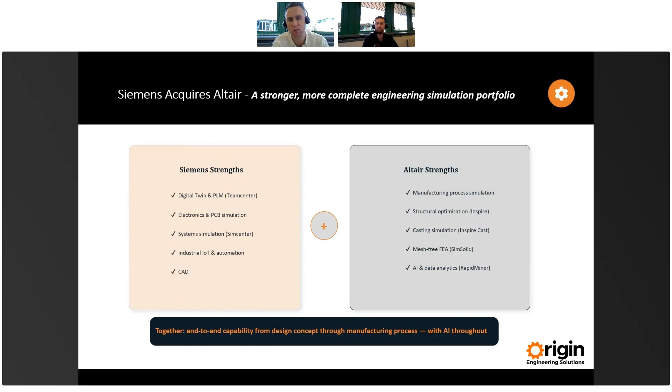Specifically for our casting customers then, we have the ability to provide CAD tools if necessary prior to a simulation, in addition to expanding the scope of what we can offer to start thinking about the shop floor. And this too lends itself to AI when we talk about that shortly.

Without going into too much detail, we've also seen aggressive development as we start to achieve parity with the other tools on the market, which have been around much longer. But we've also worked hard to try and differentiate our approach by introducing flexible mesh approaches, introducing specific modes to allow simulation to be done much quicker, and also to allow for optimization, experiments, and dealing with the product performance post-cast, essentially closing the loop and offering more before and more after the casting is produced.

So if we tie that back to some of the things that Tim is going to show and look at a casting workflow, then we start with a model. Here, we might use the built-in tools within the casting simulation tool to clean up geometry, or we might use a full-blown CAD tool, which we can now offer, such as NX Essentials.

We could then use built-in FEA tools to check the design part's performance and also potentially offer new services to customers focused on looking at the part that they've sent over and looking at opportunities to optimize that part to reduce weight and save on material usage, also while making sure the method is still going to work and we still achieve similar strength targets.

We could then look to validate the stresses on a part during manufacturing to show any problems in performance post-cast. Again, an integrated approach. We design, we optimize, we validate, we iterate, all in the same platform, all under one license.

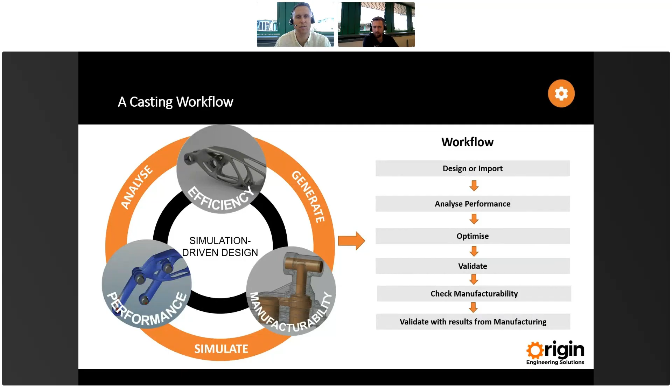So we see a lot of hype around AI. You always see the end result, and it often looks like magic. Looking specifically at a casting organization, I've broken up the silos of data, or places where you might have data, into three core pillars.

We've got corporate data, which would contain information about customers, meetings, quotes, finance information, billing, that sort of stuff. We've got operational data, which might hold information around machine performance, information about quality issues. And then finally, we've got simulation data, all of the data you're accumulating through those simulation runs. So we've got three silos of data there.

AI really can do two main things. It can answer questions based on available data, and it can trigger business processes if we provide access. We've all asked ChatGPT a question. It's not as magic as it sounds.

You ask what the weather is, so the model looks at its training data and, where necessary, searches live sources such as the internet to return the answer. It's great because it's much quicker at reasoning than we are. For example, if you sent a spreadsheet of 1,000 customers with job data, it would very quickly be able to tell you who's the most profitable.

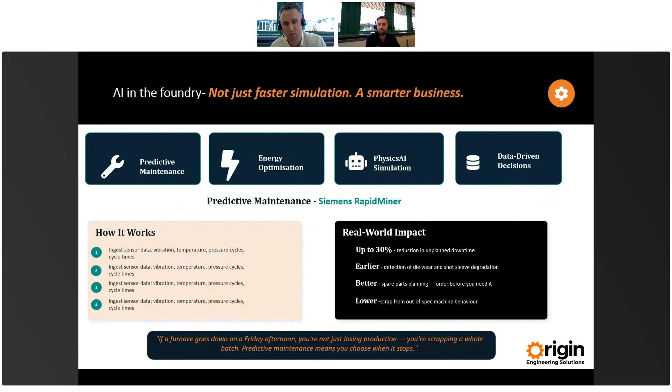Those same sensors could also be used to optimize energy usage. So we could track energy and machine energy usage across multiple process levels. We could flag furnaces that perhaps are holding temperature unnecessarily. We could benchmark the energy cost per part, so we could use that to be more effective in our quoting processes in the future. And by doing all of this, we hopefully save a bit of money, but we also demonstrate, particularly to our OEM clients, that we are taking sustainability seriously.

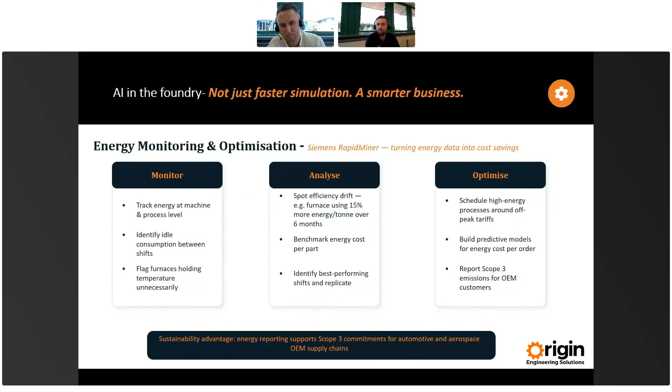The final example I will show is an example using simulation data. So all of these simulation runs that you're doing, how we might use this. Now, I must apologize, the video is rather quick. We will make this available or are happy to discuss this with anyone after the session, but hopefully I'll try and narrate over it.

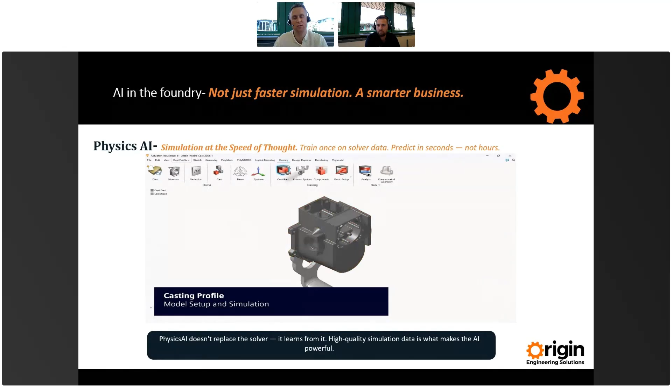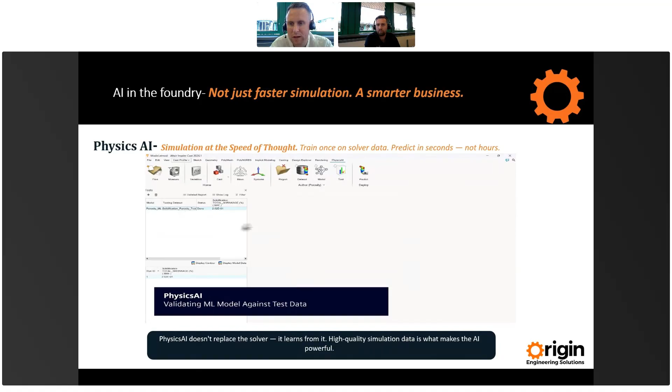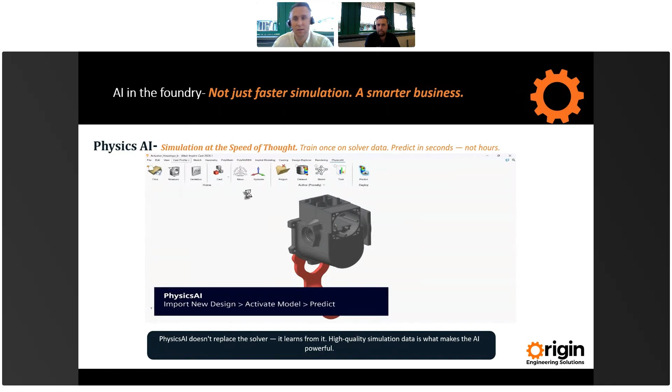What we're seeing here, and Tim will most likely show you this, is all we're doing here is creating a simulation, just like you would in any piece of simulation software. So in this example, all we're doing is getting some results. Then what we're going to do is create a particular project, because what we want to do is train a model on the simulation data. So what we're doing here is actually inputting some simulation runs to start training the model. So data's important here. Once we've done this, we can start to validate that model against some of the test data that we've got. And then next time we create a design, we're able to leverage AI and the test data that it's got to start making predictions for us.

So the value of that really is that, number one, we start to use our simulation data. We start to feed it into an AI model. So again, if someone leaves the business, perhaps that knowledge is not lost. The AI model has got it. But also, if you're doing lots of different iterations of quite similar methods, perhaps products with slightly different dimensions, then if we train AI on it, we can often get answers very quickly without necessarily having to wait and run simulations all the time. So it certainly doesn't replace running simulations, but it certainly gives us some very quick insight before we even click that run button, which is very valuable in terms of reducing simulation time.

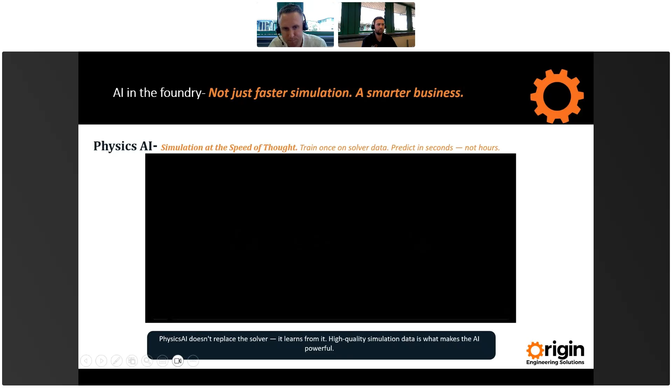So I hope you found that interesting. I mean, obviously AI is harder to demonstrate really, because essentially it's just making sense of data.

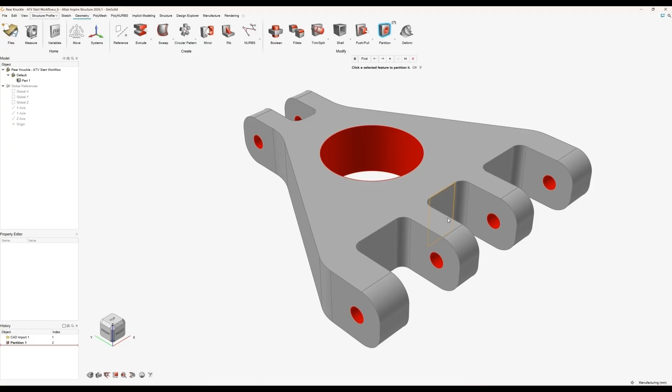I'm going to use the partition tool, and this finds all these holes and features in the model. I'm going to hit the tick box, specify 4 mil here, and accept that. And what you can see is this basically partitions these areas. What this means is for the actual optimization, it won't remove material from these areas.

So everything else becomes what we call design space. It will be able to remove material from these areas, but not crucial areas, where we've got loads, forces, and features being applied. I don't want to start removing material from a hole that is crucial to the performance of the part. So that's the first step.

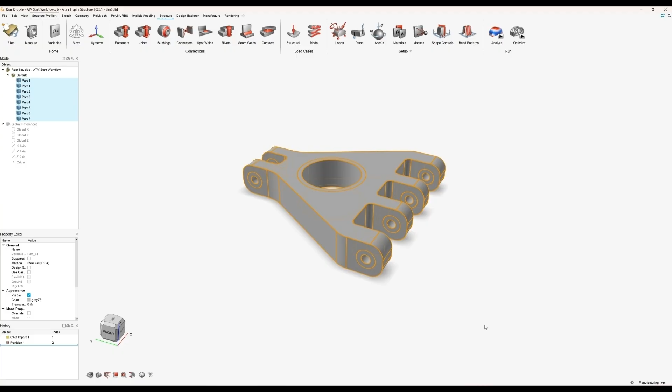Then we're going to go into our structure tab. The second step is I'm going to apply a material. So I'm going to box select all my solids, right click, go to material, and just specify AISI 304. You can do this via the materials tab. You can add your own materials, create materials, all that sort of stuff as well.

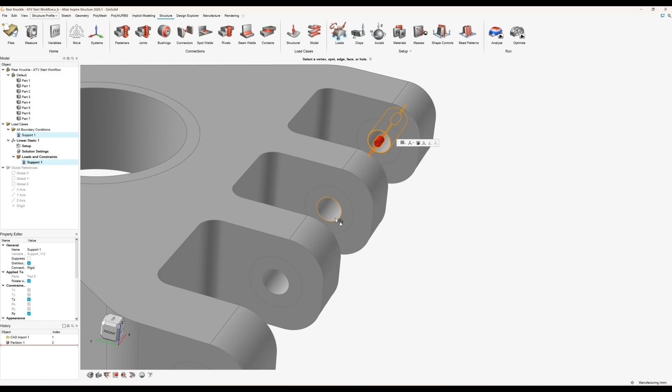Now I'm going to start applying some supports to these cylindrical holes on the model. I'm going to accept that, and then click on these supports, and they're not fully constrained. I'm going to allow them to move in this direction, so they are able to rotate around these areas.

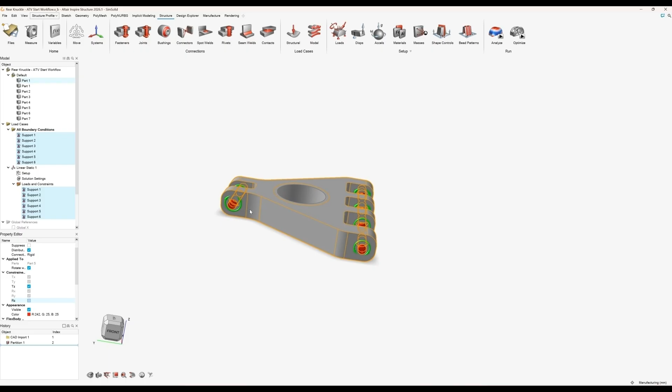And then I'm going to apply some forces. These forces are going to simulate some standard driving forces. We've got things like braking, bumps, cornering. I'm going to have 4 load cases simulating each of these actions.

But first, before I do that, I'm going to set up my load cases. So this is load case 2. Those are the supports that are used in it. This is load case 3. They're all using the same supports. And load case 4. So I've got my 4 load cases created, and then I'm going to apply some forces.

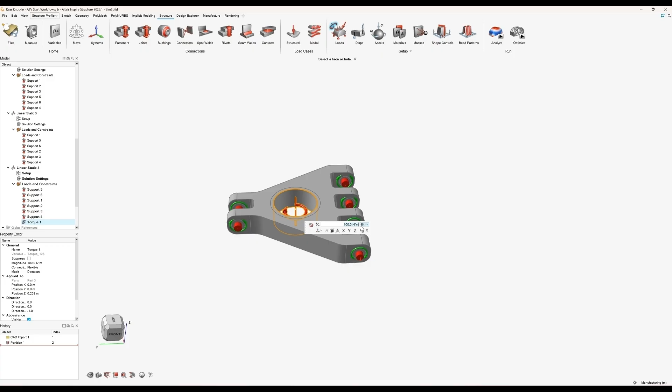So we're going to add a torque force, and I'm going to change my units down here to meters for the purpose of this. I'm going to change this to 400, and I'm going to apply a braking force in the Y direction, and maybe we'll have that at 2000. We can apply some cornering forces. Maybe that's in the Z direction. I'll apply that at 3000.

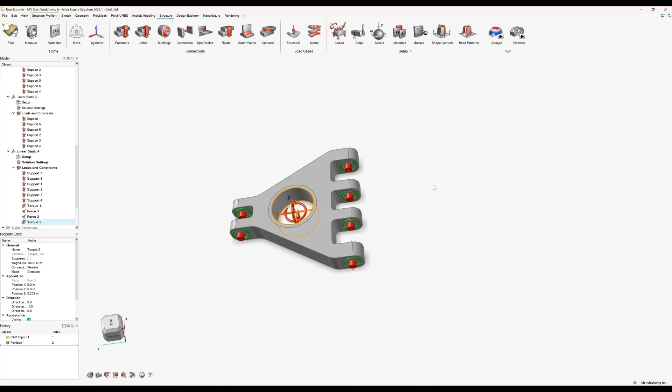And I'm also going to apply another torque force. I'm going to apply it in the rotating Y area, and just apply that as 100 Newton meters. This is just simulating going over small bumps and things. So those are my 4 forces created.

What I'm going to do is just make sure they're all in the correct load cases. So I've got my torque 2 here. This should be in load case 4, which is correct. I'll put that one in load case 3. So make sure it's in load case 3. And force 1 will be in load case 2.

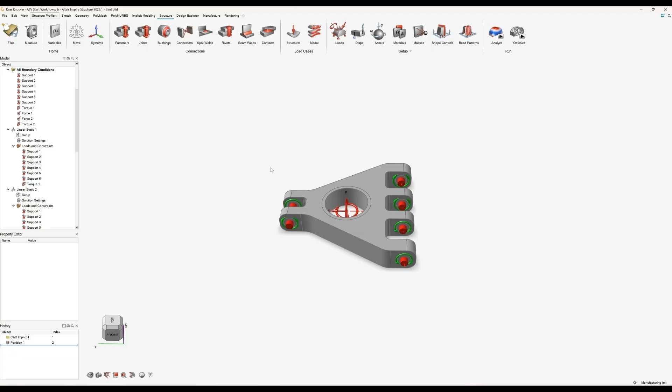And then torque 1, that'll be in load case 1. Okay, so we're pretty much actually ready to get some results now. So all I need to do now is go to my Analyze tool, click on this play button. This allows me to select which solver I'm interested in. So we've got SimSolid or OptiStruct. The load case I'm interested in studying.

Literally hit the Run tool, and you'll see no contacts in the model. That's because I did this partition. I'll click Find and Run. That'll just designate bonded contacts to those areas. But you'll see within a few seconds, we'll have a completed solution. We'll get a green flag appear here, and we'll be able to click on the green flag and actually load our results. So you can see how quick that was in actually getting results.

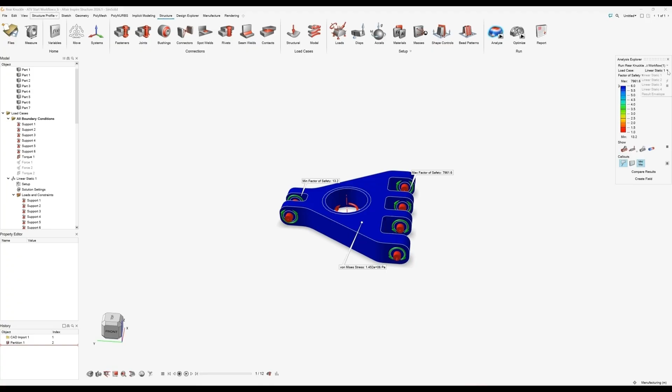I'm not going to go through the results in too much detail today, just purely because we haven't got time. Obviously, you can see some of the result variable types that we've got: displacement, factor of safety, von Mises stress. We can see things like min-max. We can put call-outs on areas to understand the values. But the thing I'm going to be focusing on today for the demo is factor of safety. So we can see in this one, we've got a minimum of 13, and we can go through these and have a little look at them.

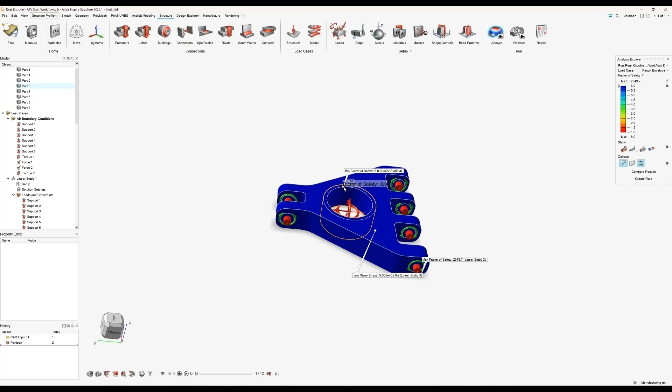But I'm looking at my results envelopes. This just allows me to see the minimum factor of safety in total. And we can see that we have got a minimum of 8, maximum of 2,500. And we can start to see where these are. So you can see actually it's on a sharp corner point. So in reality, we might not have a very sharp corner there. It might be rounded off. Probably the factor of safety might be a little bit higher. We could have added that and run another study on that. But we can see our factor of safety is 8.

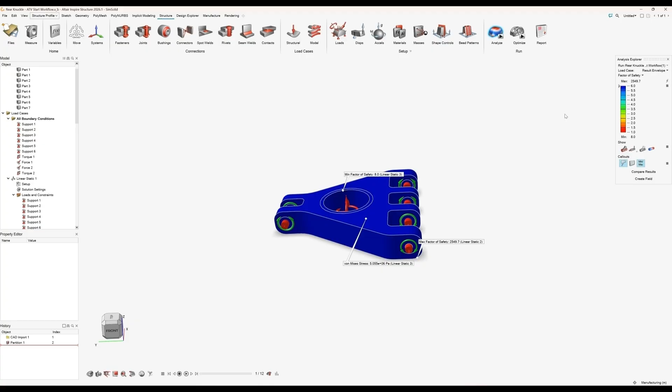Motorsports, again, high performance motorsports, maybe let's say this part's for. You might be looking at factors of safety of maybe 2 to 2.5. For the purpose of this, let's say that we're going to try and meet a factor of safety of like 5 or 6. And that will allow us to meet our performance characteristics while still reducing weight. So those are our results. We can go through those. If you're happy with them, you can move on to the next step. Also, this part, obviously, we are looking to reduce weight. I think this part weighs around 1 kilogram.

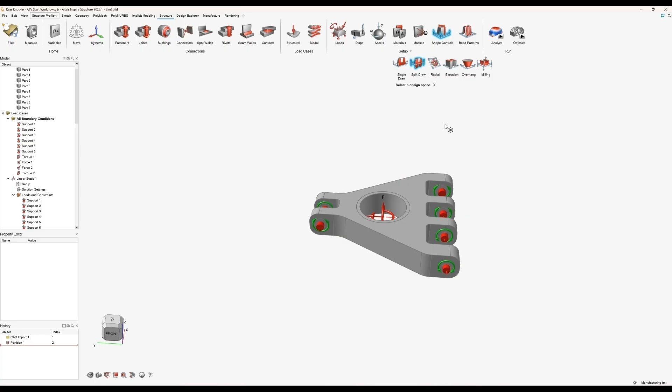So we can then move on to the optimization, which we're all set up for because we've set up the FEA. We now can move straight into optimization. But before that, I actually want to set up some shape controls. So shape controls are great depending on how you're going to manufacture your part. So for our example, we're going to say that it's going to be a split draw, select a design space, and then you can specify your draw location. I'm going to choose that one, and I'm happy with that. So now I've got some shape controls. Depending on how you're going to manufacture it, if you're machining it, 3D printing it, extruding it, you've got different shape controls for that.

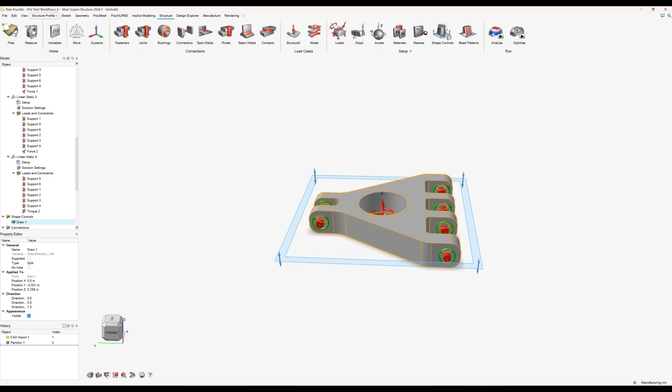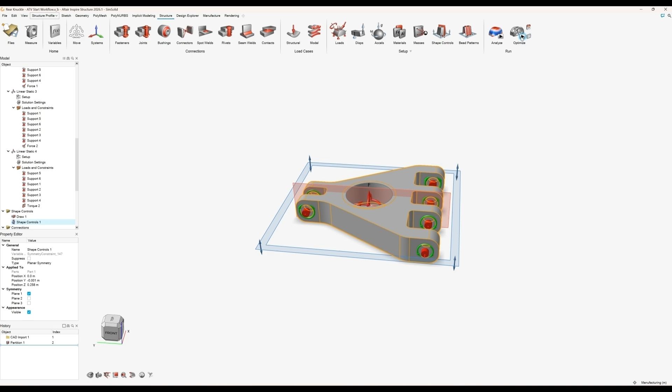Then I'm going to apply some symmetry as well. And I actually want the symmetry plane to be not that one, but this one. So it's symmetrical down the middle. So I've added my shape controls and my manufacturing constraints. Now I can move on to my optimization and set up our targets.

So I'm going to use maximize stiffness, but we can use maximize frequency, minimize mass. We've got different types of topology optimization as well, what you can see here, but I'm going to stick to standard topology optimization. I want my mass target to be maybe 60% of the part, and you've got other constraints as well. We can apply thickness constraints. We've got porosity constraints. Obviously porosity constraints will be useful for casting, but for the purposes I'm going to specify none.

We've got minimum factor of safety constraints, so I might want to specify a factor of safety of 5 or 6, and then specify the load cases you're interested in. We can turn on gravity as well, and then we can hit the run tool.

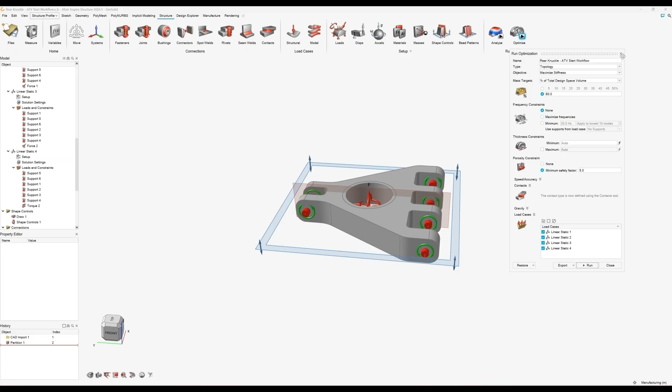No design space set, so that's what I was talking about earlier, the design space. This is an area where obviously the solver can remove material from. So I just want to right click on this solid here, specify as design space, and now we can see that's design space. Go into my Optimise tool and then click on run.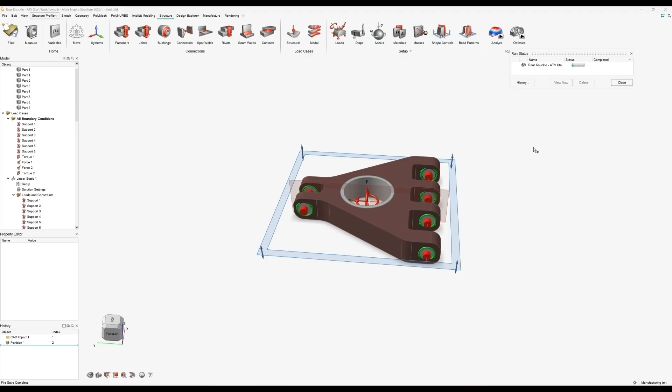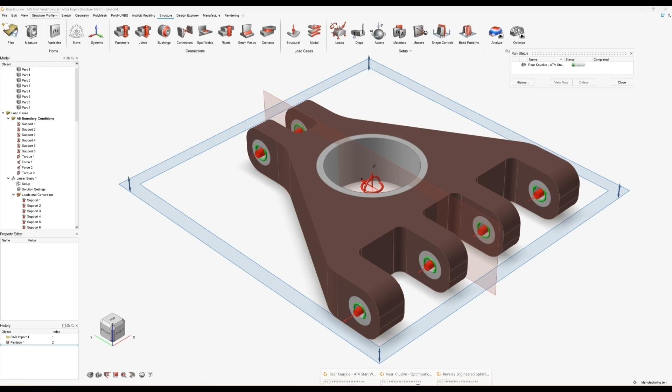So this will start solving. For the purpose of the demo, this isn't meshless and instant. It does need to actually create a mesh to get our results. This isn't an instant solver. So for the purpose of this, I'll just show you one that I did earlier. So I will show you the result now. I'll just open another instance and take you into the result of this method.

So this is what we can see here. One thing I just want to quickly touch on again is porosity constraints. So here we can specify a minimum safety factor, but this will take into account porosity constraints as well. What this does, it doesn't eliminate porosity, but it actually reduces the stress in high porosity regions. So behind the scenes, it's basically doing a quick solidification analysis.

This allows us to see the last areas to solidify, thicker regions, and then it's optimizing the part around this and reducing the stress in the high porosity regions. This is the last thing you'd want if you do have any porosity in your part. You don't want it to be in high stress areas because that could then fundamentally weaken the part further. So that's just what the porosity constraint does.

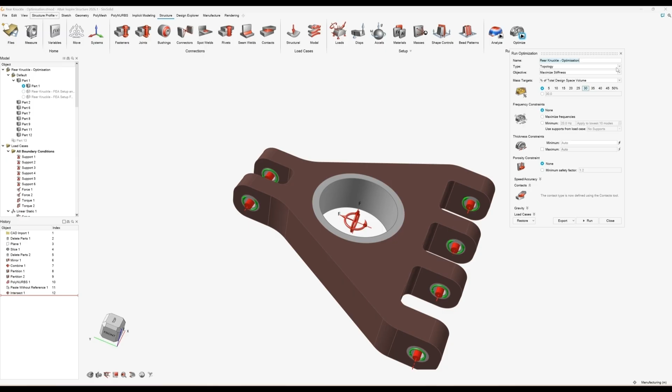So let's show our optimized part now. What we see here is the result of the software evaluating all load cases simultaneously. And this allows us to see where material is needed and where material isn't. At this point, we can use the automatic polyNURBS tool, this fit polyNURBS tool, or we can analyze the result. That will just create a validation simulation on the shape as it is here.

But I'm going to click the fit polyNURBS tool, and this will basically instantly smooth and wrap the shape. We can then actually manipulate and modify this within the software. You'll see one of the tabs along the top is a polyNURBS tab. This allows us to manipulate polyNURBS surfaces. If you're then happy with it, once you've manipulated it, you can export that as a solid model in whatever format you wish.

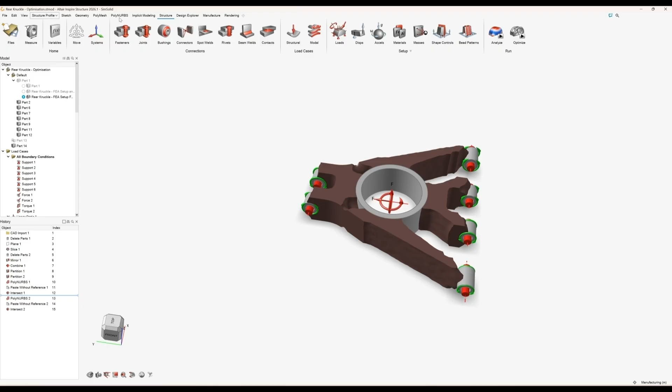Alternatively, if you aren't keen on the organic shape, sometimes you do get very organic shapes, maybe that's not your preference. You can export this as STL and use it as a guide and reverse engineer in your preferred CAD tool or within Inspire, which is what I've done.

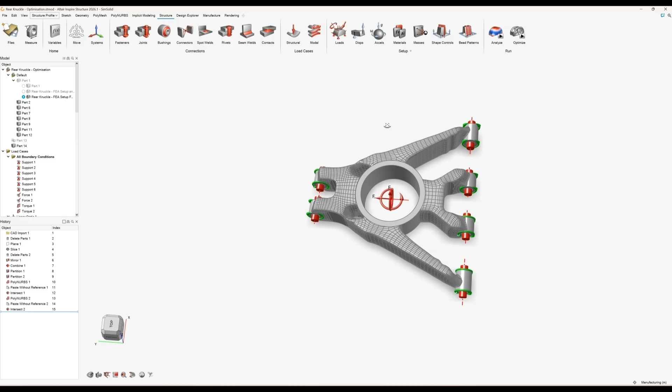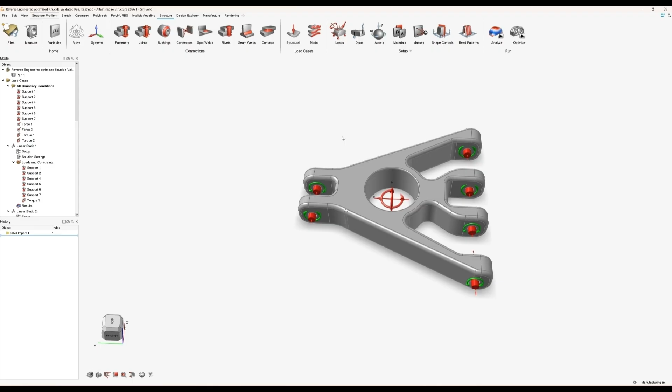So this is the polyNURBS shape. If you're not happy with this, you can go into your polyNURBS tool as mentioned and play around using all these tools, or you can use the shape as a guide and reverse engineer over it, which is what I've done. So I'll just show you that now. So this is my reverse engineered shape, which used this as a guide. I'm not going to show you that process because we just haven't got time, but it doesn't take too long. Hopefully you can see that there.

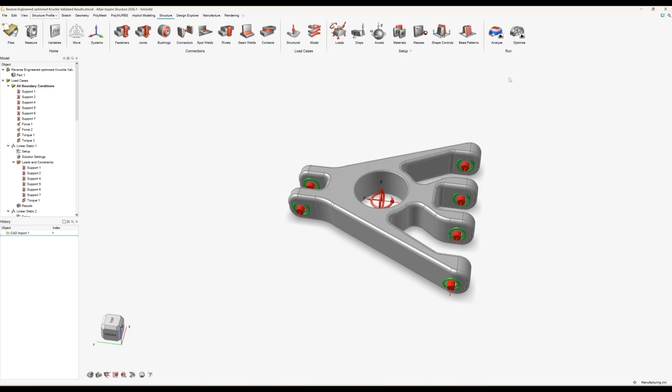But we do need to validate this. I have already got this set up, so you can see exactly the way I had to set it up before. It's the same constraints, same forces and loads, but we need to validate it to make sure it does actually still meet the performance requirements. This one's already got results in it, so I can just hit that button there. You can start going through some of your results again and look at different result types.

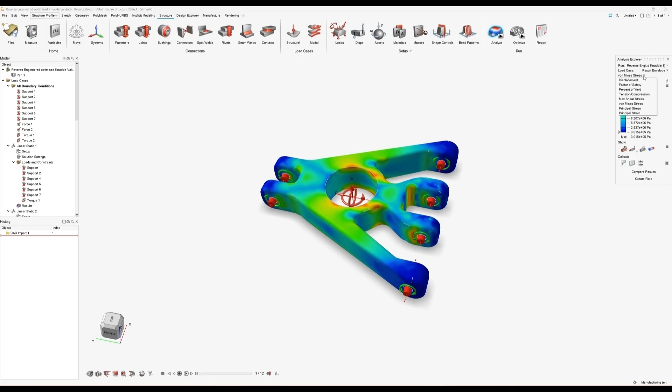I'm not going to go over these in too much detail, but the main thing we were looking at for the purpose of this webinar is whether we meet the factor of safety requirements that we were after. So I'm going to specify the results envelope, go to factor of safety, and we can see here minimum 7.9. You can see I've got some small radiuses on this one, so that might have helped. But we've got a minimum factor of safety of 7.9.

I think before we had a factor of safety of 8, so slightly less, but we've reduced the mass by quite a decent amount and are still matching the performance characteristics that we need. So you might even say it's still over-engineered a bit, still room for improvement, still room for mass reduction.

So that's just showing that we validated our model. It still meets the performance requirements, but that's stage 1 complete. Now stage 1 complete, now we can move into obviously manufacturing validation.

Obviously, this is where your knowledge is crucial, and where partnerships can be formed with your customers on projects, because it's all well and good the optimization spitting out a final shape, but this is where you will know if that part can actually be cast or whether it's going to be very, very challenging to cast. So that's where your knowledge comes in crucial, and as I say, partnerships potentially can be formed with customers or partners. So let's move into the cast profile.

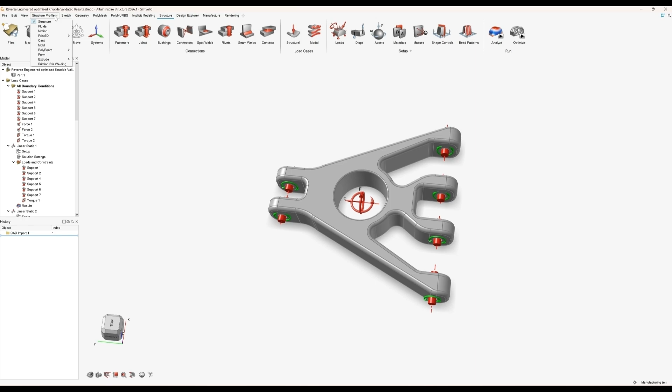So within one click, we're seamlessly in the Inspire Cast program now. Hopefully you can see here that we've got a few different tabs along the top. Still got our sketching tools, our geometry tools, and other modeling tools. But now we have our casting tab, and obviously this is where we set up and explore our results from our casting simulation and our method engineering.

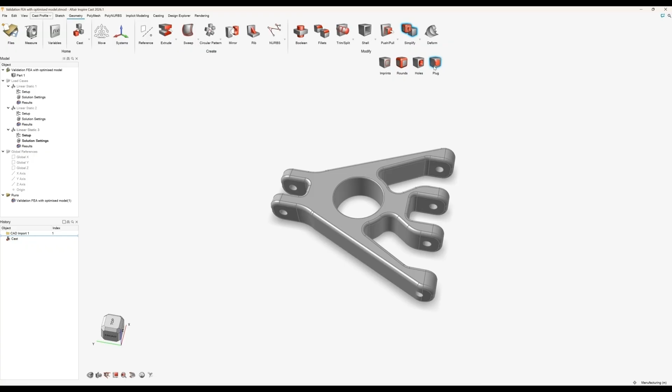Workflow in this tool is left to right, so you start from the left and you work to the right hand side. But first of all, I'm actually going to use a geometry tool again. We did briefly look at that partition tool earlier, but I'm going to use one of my simplify tools now. So in simplify, we've got a number of tools to potentially defeature your model, but one tool I'm going to use is the plug tool, and I'm going to plug, so basically fill in, all these holes except that center bore, and hit this button here, and we can see those holes have been filled in.

One thing I actually need to do following that is just use our Boolean tool, because actually these are all separate solids at the moment. I'll just box select all these, remove the imprints, and now that becomes all one piece. So the reason I've filled in those holes is obviously they are crucial, but we are going to machine them out afterwards. They might be to high tolerance, and potentially if I cast them, it might cause some issues, maybe thermal hotspots, fluid turbulence, and potentially core pinning issues.

So now onto the method development, and what makes Inspire Cast such a great tool is its simplicity and accessibility. All the clever stuff is done behind the scenes, meaning you get a really clean user experience with straightforward workflows. And again, we haven't got loads of time to go through true full method development, but it might look something along these lines here.

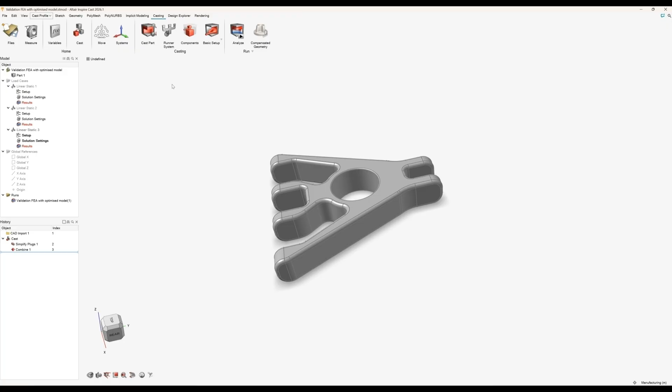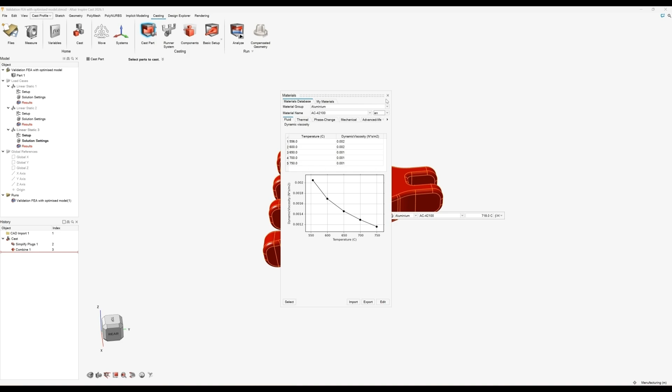So in our casting tab, as I said before, its first step is to designate the cast part. So we can click on this tool here, choose our material, and then specify a pouring temperature. If we click this button, this takes us into our material database. We can see all the different standards, and we can see all our properties, and we can import and export materials and modify these properties if needed. I'm going to accept that. The next thing I need to do is just check that gravity is in the right direction. I'm happy with that direction for gravity, so I'll accept that.

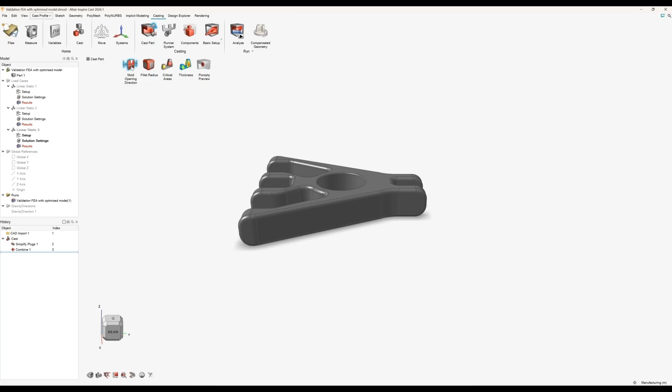And then we also have a part analysis tool. So this is a great tool for quickly checking things like mold opening direction, so we can see if any surfaces haven't got any draft angle added to them, which might cause us some problems. So obviously I have forgot to add draft angle to these areas, but that's something I'd probably want to look at if I actually was going to go ahead and create a mold for this.

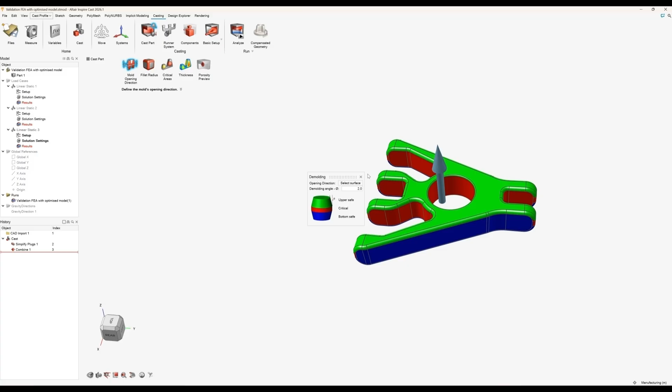We've got a fillet radius tool, which allows you to check the fillet radius in critical areas, and a thickness tool. You can just click this tool and it will give you a thickness analysis, telling you your thin and thick regions. I'll change my units to millimeters so we can see our thinnest and thickest regions, with these color schemed, color mapped there.

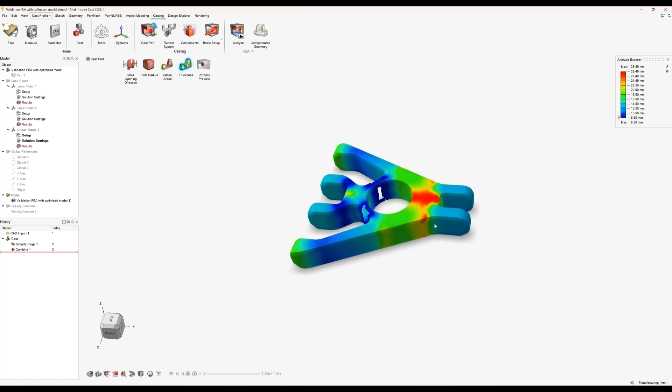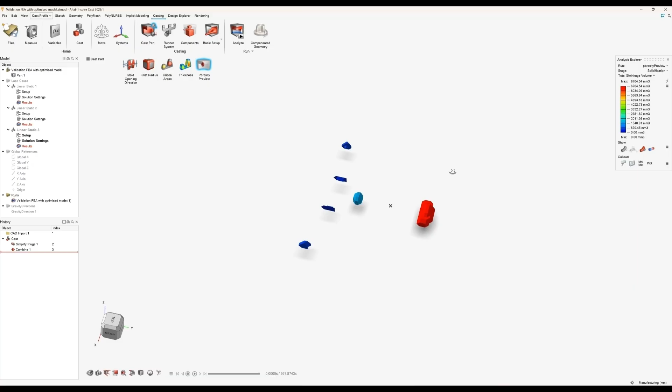We also have a porosity preview tool. If you click this, it gives you a quick solidification analysis within a few seconds, which allows us to see where we might get potential shrinkage. We can look at solid fractions to see potentially how this part might solidify. This doesn't take into account runners and components, but it gives us an idea of the areas that might be last to solidify, which can guide us in terms of component placing.

So those are the things we can look at there. We can also look at geomodulus, which might help with feeder size and stuff.

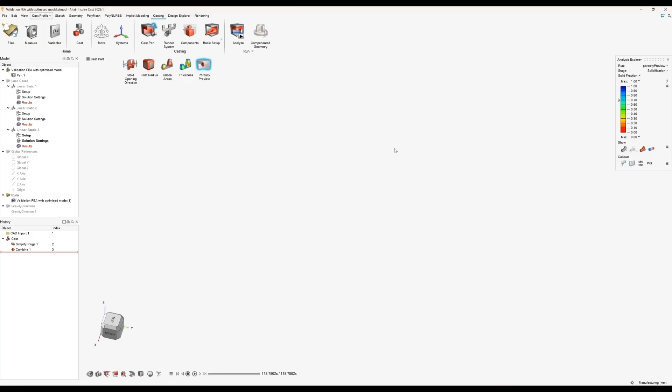Moving on to the right hand side, looking at this part, depending on volume and requirement, it would most likely be high pressure if high volume, or gravity die cast if lower volume, maybe for motorsports. To keep things simple, since we have limited time, this will be a single part mold, and because most people on the webinar selected gravity as their main casting method, we'll go with gravity die cast here. Note that all casting processes are included in the license.

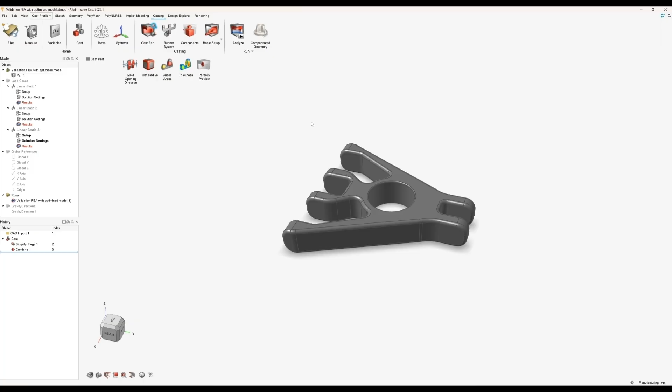So we've got all our gravity casting options: gravity die, gravity sand, investment, and tilt pouring. We've also got high pressure and low pressure. So these are all our casting processes.

Without having to design a full method, we can play around with gates and gating locations within the software to understand fill patterns. We can add components to see how these react, and run quick simulations using things like virtual molds, allowing us to speed up our method development.

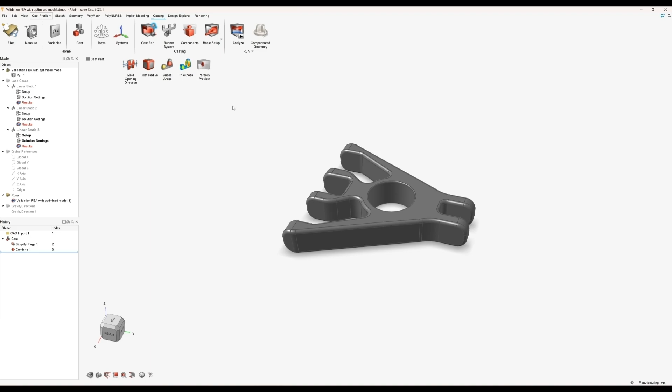So what we're going to do now is show you an example of this. I'm looking at this part, and you might be thinking how are we going to fill this part. You might go into your runner system and create some gates initially, trying to understand fill pattern and that sort of thing. So let's use the gate tool.

I'm going to look at it from the front here and add some gates. You can change the size of them, change the shape of them. Let's change the size of them. You can compute flow tracing and move them around. If you're filling from a different area at different times, you can do all that sort of stuff.

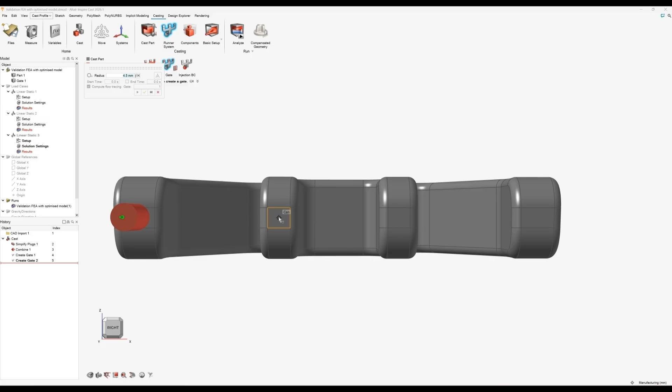So I'm going to create, let's say, 4 gates along here, and knock those up quickly so we can see these gates added. The injection point's already been added, so you can see these are the injection points, where material's flowing in - that's what that tool does.

We haven't got a full runner filling system yet, so we don't need to use that tool.

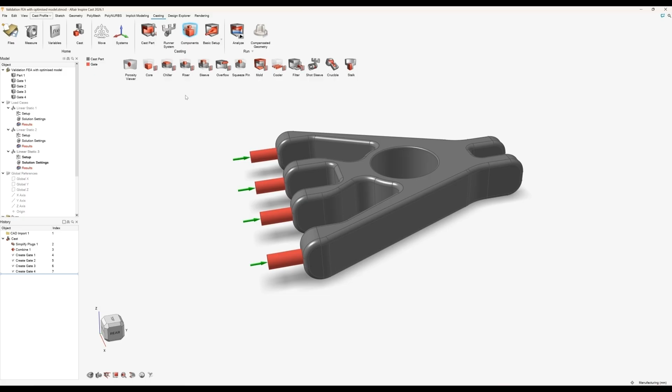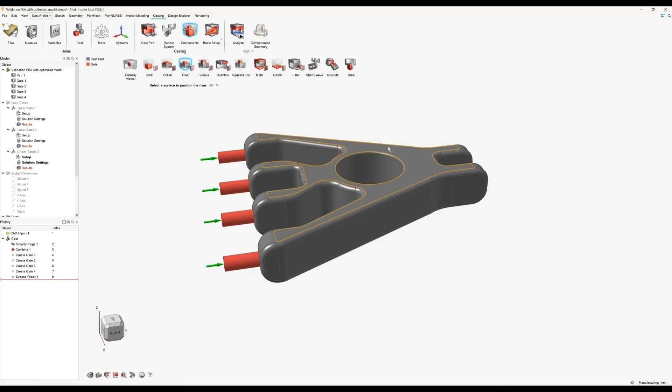Moving on to the right hand side, this is where we can create or designate any casting components. You can see we've got that porosity viewer we just looked at, which might guide us in terms of where we want to add some of these components. We can add things like cores, risers, sleeves, all different types of casting components, and we have the option to either create them in the software or designate them if you've modeled them up in other software. For the purpose of this, let's add a riser, and we'll add it just here.

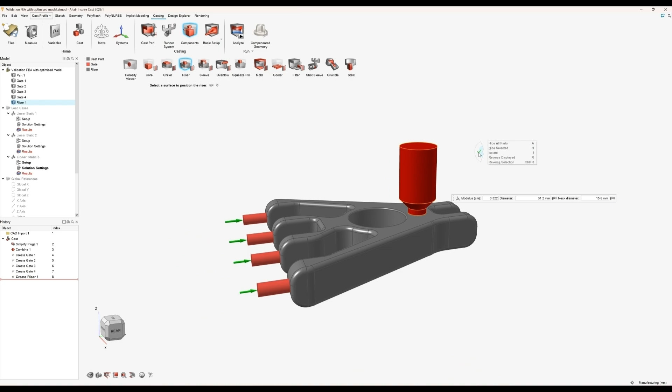Again, we can modify these - this is our modulus value, which we could have got from that porosity preview. We can modify our neck diameter, or use our tools to move the neck down and that sort of stuff. This is just really a virtual riser or feeder at the moment, used to get an idea of what might happen if it was placed there.

Then we can move into the next step, which is setup. So we've got different types of setup.

Basic setup's really good for just getting a quick feel. This is obviously, we can choose filling time or initial velocity. If for gravity die, you might have a certain velocity that you want material entering the gate, and you might use that. So that might be like 0.4 meters per second, so I can set 400 for that. And that'll estimate the filling time it might take based on the volume of the part and all the other variables. So you can see that roughly will take 2.5 seconds or so.

If we want to go into a bit more detail, we can specify gravity casting, and we can specify constant liquid level on a sprue if you're maintaining the pour, spoon height, flow rate, tilt pouring, and investment casting as well. But we're going to just, this is method development, so this is going to be quick and dirty, understanding flow, understanding gate positions.

So we can then move on and click the Analyze tool, and here we can specify the type of solutions that we want to study. So we want to do filling and solidification. We can specify when our part's going to be opened.

Then with meshing, here I've got options to specify my mesh size, or do a faster or more accurate run. And then we've got different strategies. So I'm going to specify congruent, but you've got different strategies depending on your geometry. You might use one strategy over another. So these are all your different meshing strategies.

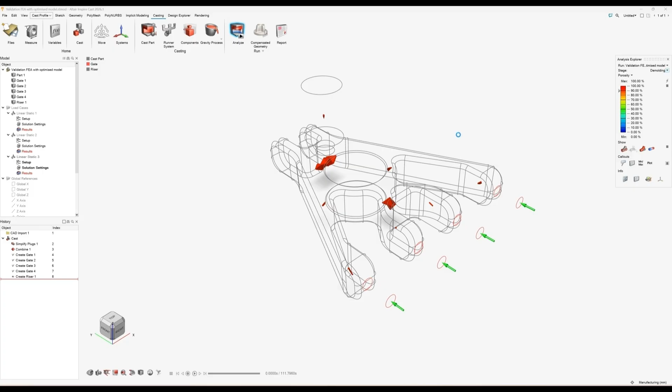I'm aware that I've only got about 5 or 6 minutes, so I'm going to have to fly through this. So now we can load the results, and we can start looking at our results. So we've got different stages. In the filling stage, we can obviously look at our fill pattern. We can see down here how long it takes to fill. We can animate that fill as well and see if we get a nice laminar, smooth fill. So I'll just play that, and we can see the part filling over those 3 seconds.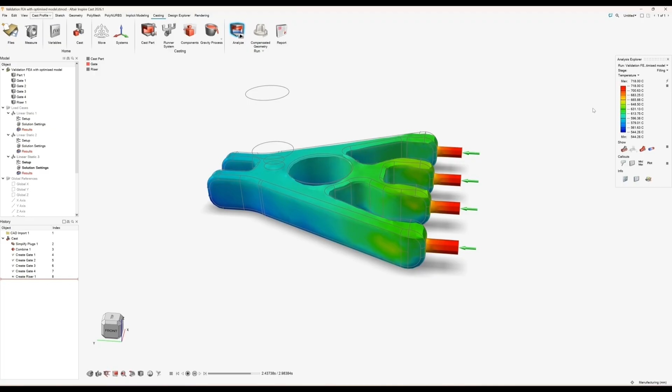Other results that we can look at in the filling stage - I'm not going to be able to go through all the results, just haven't got enough time. But for certain things, you might be interested in like last area to fill, or velocities and what speed things are entering the mold. Mold erosion, we've got cold shuts, fronts of material meeting, all that sort of stuff you'd expect to see in here - that's all in there.

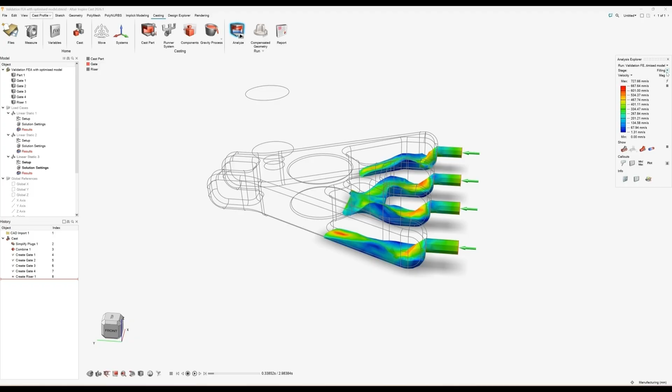Again, loads of result types, but as a method engineer, you'll go through a few different designs until you get to your final one. Obviously, the one we've just shown wasn't great. With virtual gates, we can force the metal to enter the gates at our designated velocity. But using our knowledge, we may have run a method with a full filling system and seen this - but it's very rare for the metal to distribute evenly, which might create unequal filling velocities and a non-laminar fill.

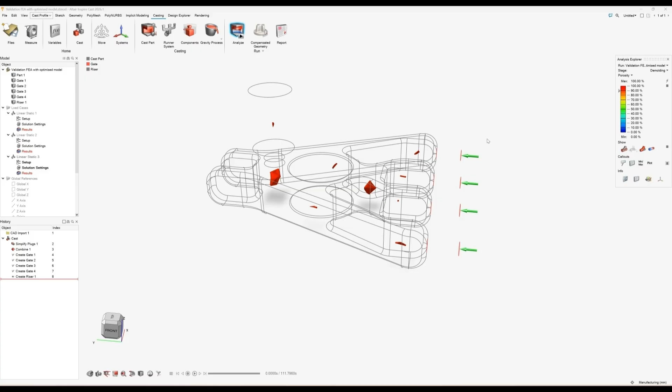So because of this, let's pretend I've been method developing this, I've decided to fill from the other end and force a more balanced fill and a fluid front that will converge around that center core. Due to time constraints, we're literally going to have to skip to the final method setup and show you how we do this.

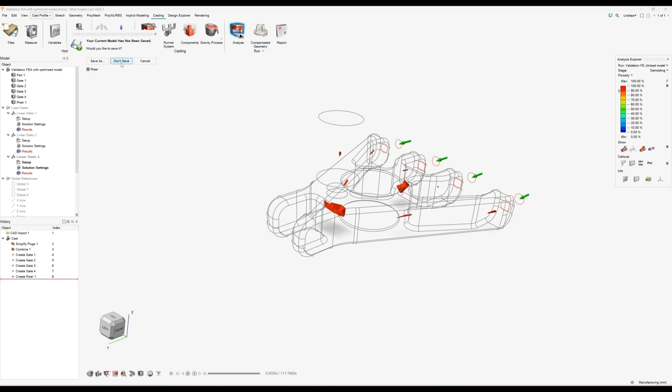So if I just open the model, you might import your model. You might have CAD'd something up either within the Inspire software or in a CAD tool that you use, and this would be the setup. Again, left to right sort of workflow.

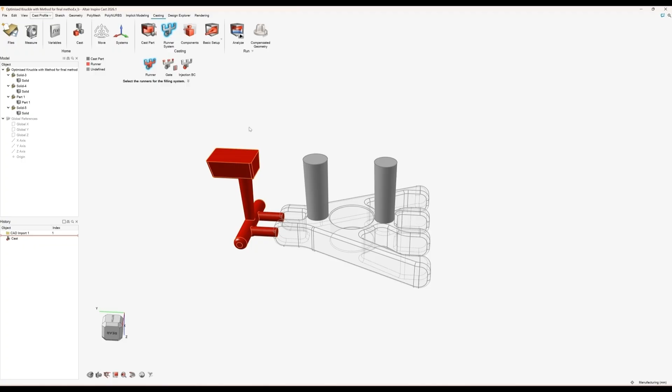Select your cast parts. We'll go AC 4200, 42100. This time we've got a runner system. Let's designate that, and we also want to create a gate. Let's modify the size of that, and this is simulating pouring from a ladle as such.

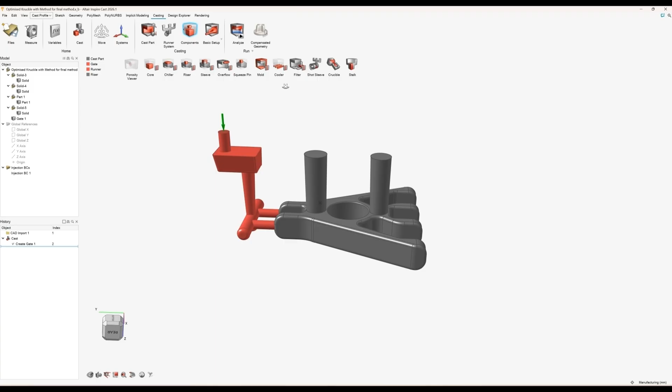Then we can move on to components. We can specify that we've got here 2 risers or feeders, though a number of other components we could create or designate. In this instance, you might go, actually, I'm going to create some 2 chills and just whack these here, modify the material, modify the temperatures, whack some chills on.

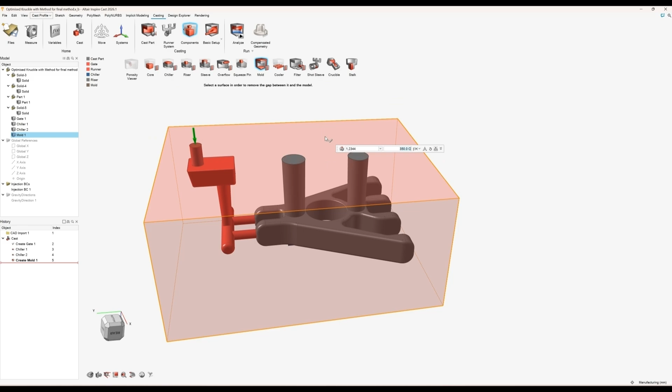And we also want to create a mold. So tool steel, temperature, different things as well. We can add coatings and all that sort of stuff, but I'm going to bring that mold down to the top level. Accept this.

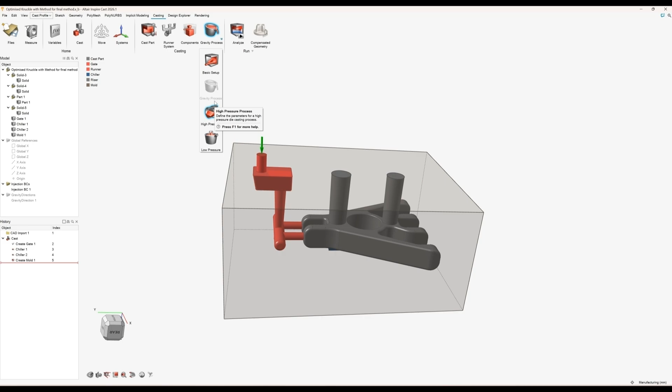Then we can go into our process setups. So gravity process, in this instance, we can specify a number of different things as we looked at before. I might specify sprue height in this instance, and specify a 50 mil. If you are doing investment, you can click investment, and we can create shell molds and all that sort of stuff. And the same for high pressure and low pressure. We can create casting components like shot sleeves and multi stalks for low pressure as well. We've got a mold in this instance.

Now I want to analyze this, and I can go into stage. I'm going to run solidification. I'm also going to compute deformation and perform trimming. This allows me to get my results like residual stresses. Again, I can use cycling if I want to.

Going into my meshing, this time you might run this at a more accurate mesh, with a smaller element size. Specify your strategy for your meshing. If you want different component mesh factors for different things, you can do. And then we've got options to select things like air exits if we've got venting and all that. We're going to then click the run tool.

Again, I'm flying through this. Sorry, guys, it's just we are short of time, and we do want to allow some time for questions.

But we'd run through this again, go through the setup, and then, as I did before, I'll just show you the results, and hopefully we'll see a defect-free casting in a second.

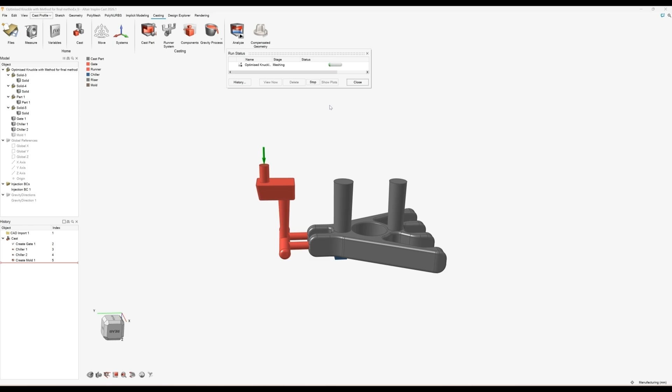So these are my loaded results now. I'll just turn those back on. I am literally out of time, so I'm going to have to wrap this up very quickly and pass back to Rob so we can actually answer any questions of yours.

I don't want to take up too much of your time, but we can start to look at some result types here. Obviously, we are simulating now with a mold, so we can look at other result types, mold erosion, mold temperatures, all those sort of things. This is the filling pattern now. We can look at velocities, temperature evolution as it fills.

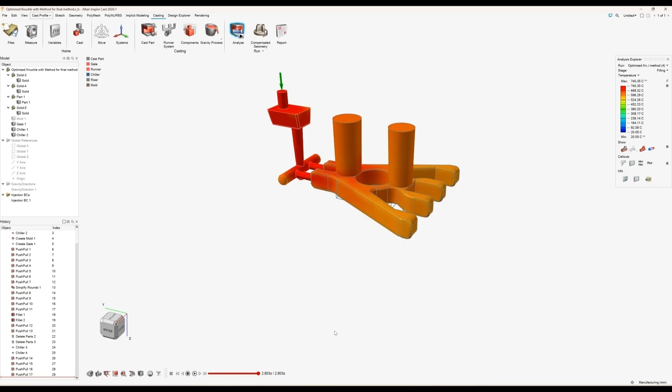One thing we did here, if we look at our porosity, we hopefully will see that all the porosity now is in the risers, which is where we wanted it. And if we go to our trimming, or in the demolding stage, we can then look at things like residual stresses in the parts as well.

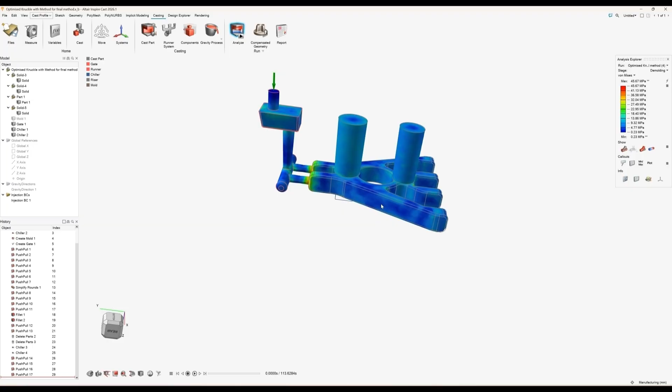So if I look now, we can look at our residual stresses in the part, and we can look at max locations. We can put callouts and things, and we could go full circle if we wanted to. So we could actually map these results back into FEA, and then do a final validation taking into account your residual stresses in your parts as well.

So we can go full circle. I'm out of time, but one last thing, we can obviously create reports and things on any result types. I've just shown how we can go from a raw CAD block to an optimized shape. We verified it and ensured that it was actually a manufacturable component, all seamlessly within this Inspire ecosystem.

We have really just scratched the surface on the software and only shown one method relating to gravity die casting. But if you do want to see your casting process or the software in more detail, we can set up more tailored sessions, and speak more about AI and that sort of thing as well.

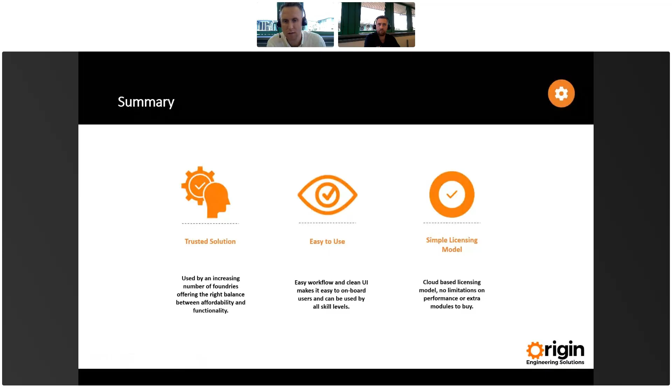Just in terms of next steps, there's a couple of things that we can do for you. As Tim mentioned, more demonstrations. Some of you on the call will have different casting methods entirely. We can talk about that. Some of you might be happy with your casting simulation software and have actually joined more to learn a bit more about AI. That's fine as well. So we can do a more detailed discussion or demonstration based on what you might want.

And we can also, of course, provide trials for the solutions. It's a bit harder to do that with AI-based tools, but certainly the optimization tools, FEA tools, casting simulation tools, we can provide access to those for you to have a go. And of course, share examples of customers that might have moved away from more expensive software for business case support and all that sort of thing.